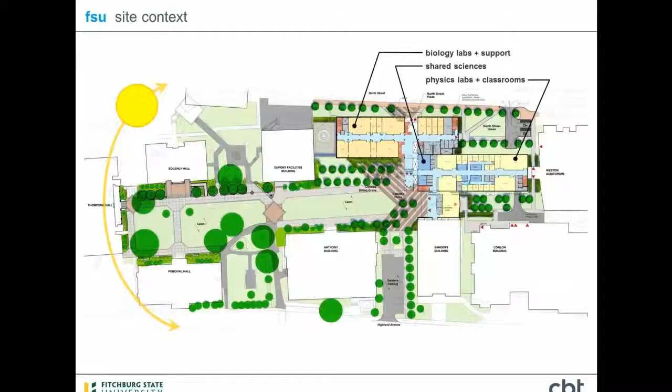The design of the building uses insulated metal panels, double layer of glass, masonry, so punched openings as well as curtain wall. You can see in some of the sections that we have some very tall floor-to-floors for the lab spaces, and then the existing building has much shallower floor-to-floor heights.

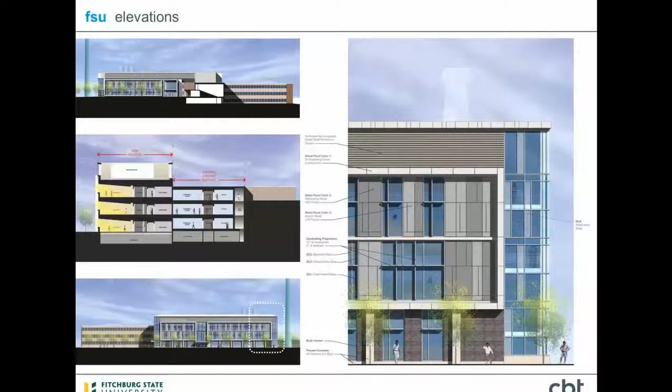So looking at how CBT works, we are evolving as a firm, and the evolution of the firm is really based on evidence-based design, as well as building information modeling, BIM. So we are moving forward with that type of attitude, which means that we're doing work in 3D visualization, using 3D to communicate design, with software packages like SketchUp, Photoshop, Revit, Navisworks, as well as physical models.

We also see that being able to have information captured in our drawings is important in how it's sorted. So Revit is the main platform that we're using. And the biggest component that we've added to our work and how we're working is simulation, so building components and elements. We're using Ecotect and IES to achieve those simulations.

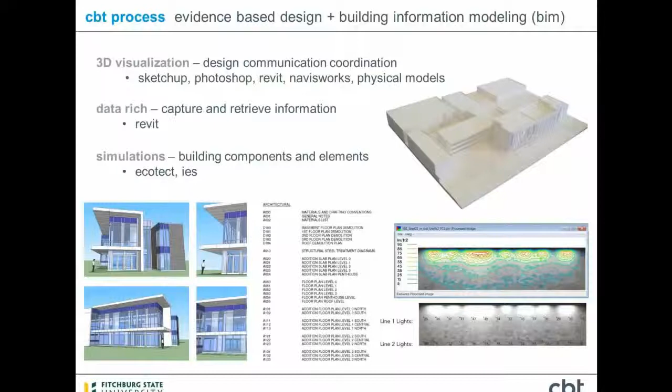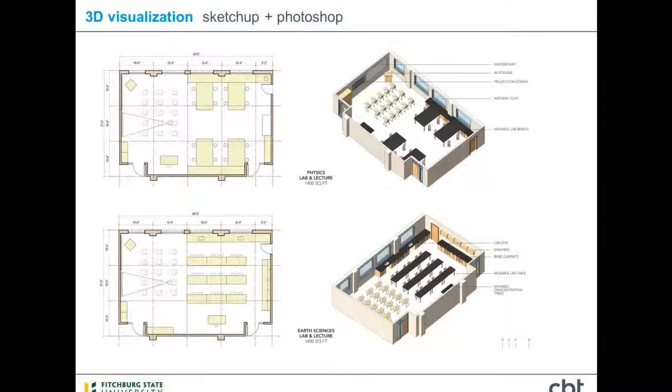So on the 3D visualization, very early on, we're doing quick drawings that are two-dimensional that quickly pop up into three-dimensional drawings so that the user group can see what they're doing and getting, and they can quickly respond to programming needs.

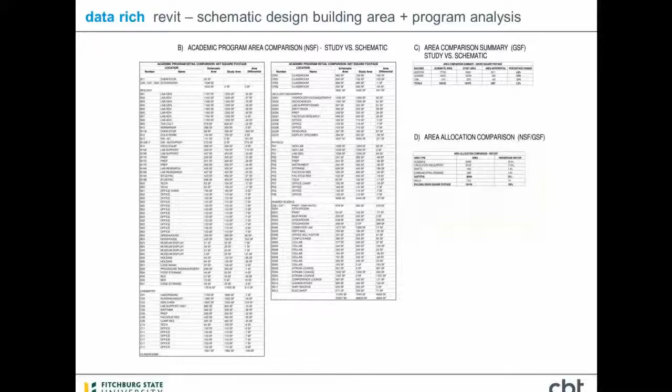Simultaneously, we're working on bringing Revit into the early stages of programming and into schematic design, being very specific about each room and its component. And we're always going back and forth between what was in the study and what was in the schematic design on the plans, to see what the differential is.

So we're tracking all that information and getting a feedback loop from the users as well as the client in terms of staying on target for their space needs, their use needs, as well as their cost requirements.

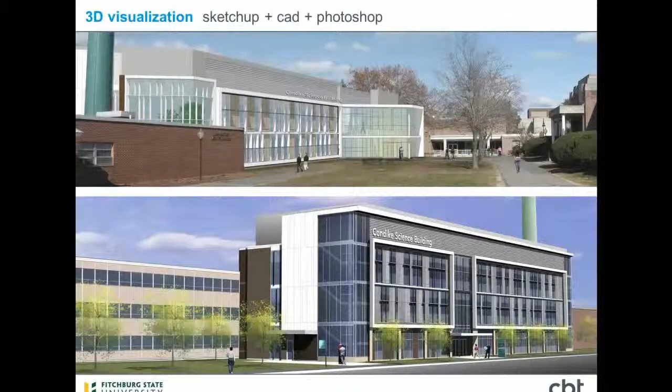This shows you depictions of our design process where we use SketchUp in the upper montage of building in process, and then also using AutoCAD drawings that get pasted up into three-dimensional depictions of the building so that you can see it from different viewpoints. And again, this is about communicating with the clients, for them to be able to understand what's happening on their project.

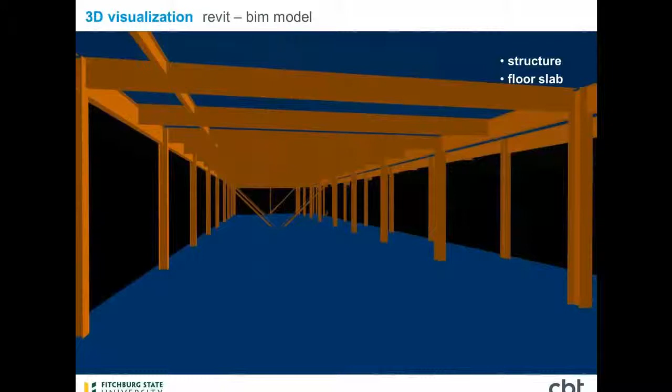And as we move through, we're using BIM, the Revit platform, to create three-dimensional drawings right from schematic design. But these next slides show our work with the structural engineers as they're developing three-dimensional drawings, mechanical, electrical, fire protection, as well, in 3D.

And we're working with lab designers. For example, this lab designer is in California, so we're sharing information across the continent. Our structural engineer is also in another state, so most people are not locally situated, and the information is being shared through the Revit model and using Navisworks as a reader. So this is a colorization, but these are part of our working drawings for the Fitchburg project.

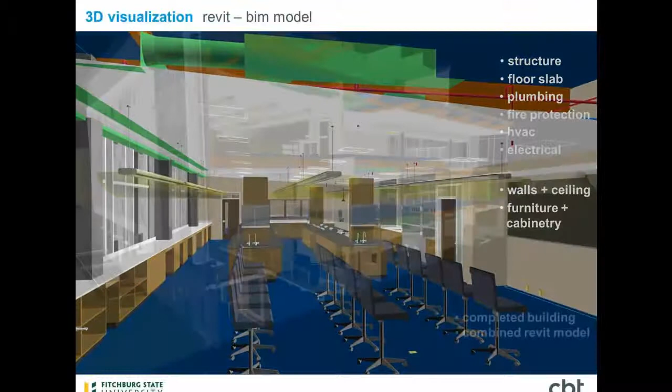And this shows some cutaways of the construction documents for the project. And then we also take construction documents and we'll change the color and change some of the lighting and use them as presentation tools.

So the process of environmental simulations has been of interest to us because it helps us understand how we're thinking about a building's form and skin, taking a lot of the knowns that are in our minds when we start off on a project. So we use Ecotect very early on to generate some basic understanding of form and massing, and how it relates to the specifics of the climate we're in. For example, this one's in the northeast United States, but we have projects in Saudi Arabia with very dramatically different climate issues, so orientation and exposure become important.

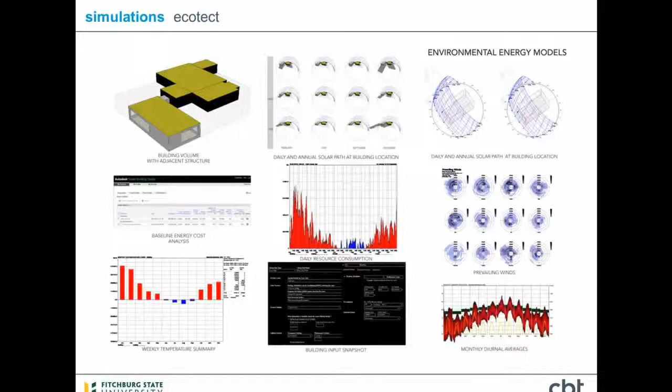So we found that Ecotect is a good tool very early on, but ultimately what we were interested in is developing the design further. This is where the IES software becomes the primary tool for our simulation. So we leave early schematic design and start jumping into IES software to look at wall assemblies and how light is penetrating and heat, and that starts occurring at the end of schematics for us.

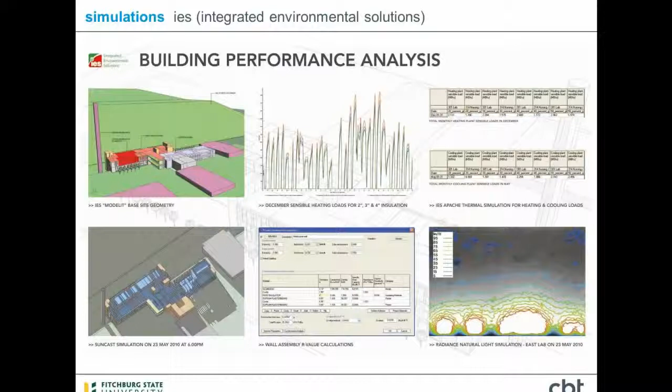So the real core of our discussion today is going to be focused around the simulations we were using with IES, but we want to take a moment to discuss the team process, because for a truly integrated design process you need the key design team members working together and generating information early on. The primary players are the mechanical engineer doing the design of the systems, the commissioning agent who will be fine-tuning the systems and working with the owner or user group to hand over the building and make sure they know how to maintain it, and also, especially in the United States with the rise of the LEED rating system, an energy modeling consultant who runs simulations and validates or confirms the energy reduction targets set early on in the process.

In the Fitchburg process, our MEP engineer was working early, coming up with creative ideas, relying on their experience in ways of saving energy, but also dealing with some of the constraints of the existing building. In our case, we were doing an addition onto an existing building that was going to be maintained and occupied during construction, so the new MEP plant had to be contained entirely within and on top of the addition, so it would be up and running when it came time to switch over. We also had concerns about putting additional load on the roof of the existing building to avoid some seismic upgrades. This image shows the reality of what they have to deal with as they work to optimize the systems.

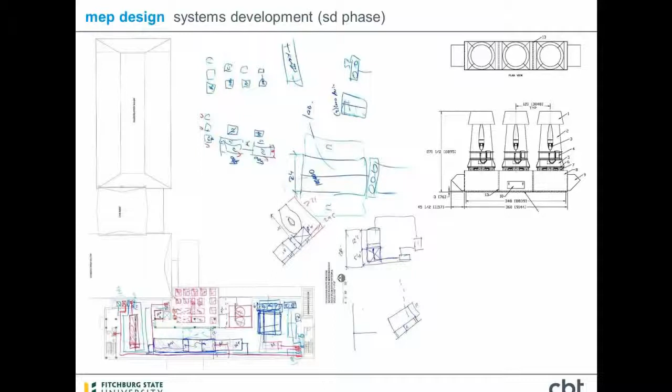Bringing the commissioning agent on board early is critical, because as the ones who see the systems through to operations and getting run efficiently, they need buy-in on the basic design concept for the systems. But they're also a valuable resource in looking at benchmarking and different criteria. In our case, they looked at other state universities developing science projects, Labs 21, and a number of other peer institutions to find out if we're pushing the right envelope, lagging behind, or way out ahead of where other comparable institutions might be.

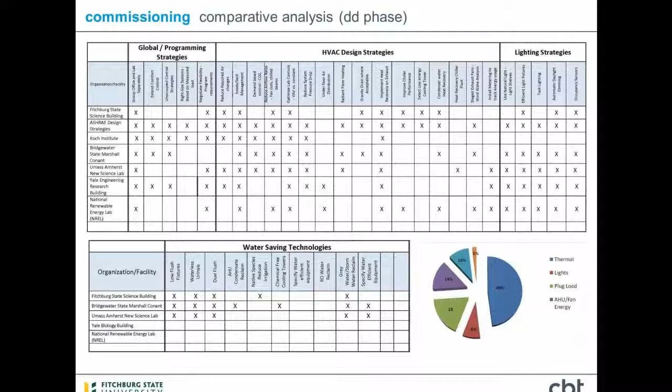Then with the energy modeling consultant, they're primarily focused on MEP systems, measuring against baselines and targets. This diagram in the top right shows something very early and schematic, before there's really any sense of exactly what the systems might be. We see a lot of green bar charts to the left of the baseline, meaning we were not yet achieving targets in those areas. The goal is that by the end of the construction document period, all those things would be swinging around to be to the right of the baseline.

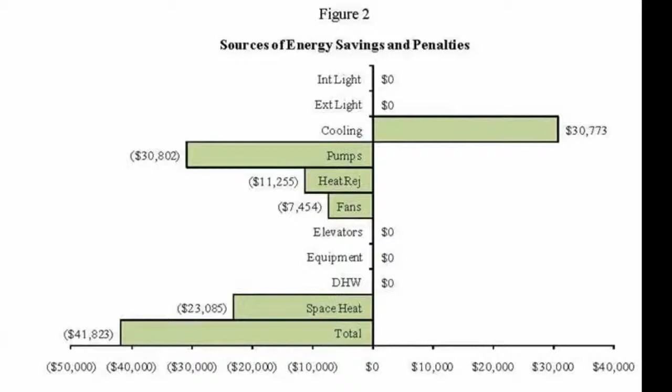In order to supplement the work we were doing with the energy modeling consultant, we wanted to take a more active, proactive role in simulations and modeling so that we could get data in real time as we're designing the building. We weren't comfortable with a more traditional approach in which you send out a milestone set of drawings for cost estimating and for energy modeling, and then when you get the results six or eight weeks later, it's really too late to incorporate the best and optimal design.

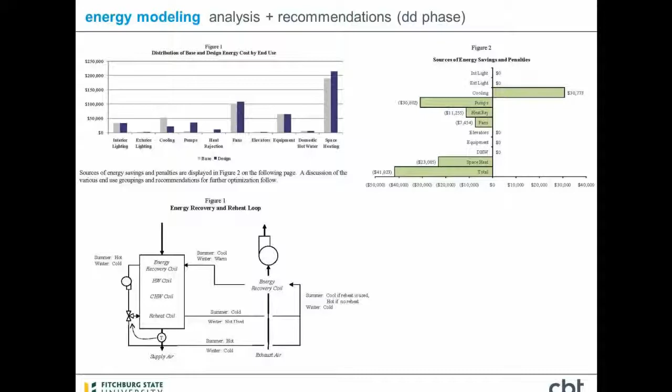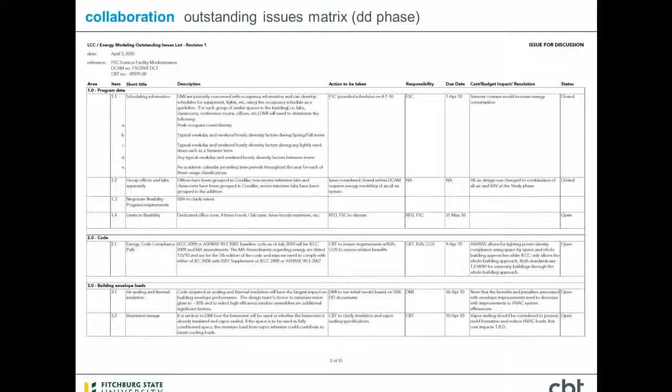If the project is working well through this process, there's a tremendous amount of ideas and data being generated, and an ability to organize and track that and find out which are the priorities, and make sure we've accommodated the best ideas that the team has come up with. We need organizational tools like this chart, where we've grouped ideas for energy savings into different kinds of criteria and categories for easy tracking.

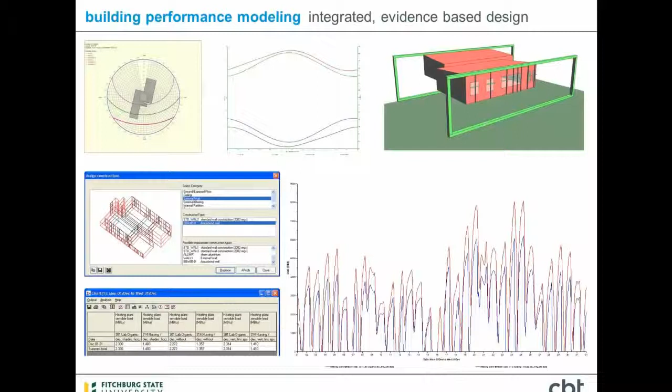And so that really leads us into the energy modeling we were doing ourselves. This is just an overview of the range of topics we were looking at. As Alfred noted, we were primarily focused on thermal issues, on solar issues, and on daylighting issues. The next series of modeling simulations we're going to bring you through will show you that.

What we were using then is our own simulations to find the good, better, and best solutions, incorporate what we thought was the best solution, and then having run the simulations, rather than waiting for the results, we were providing the data to our energy modeling consultant to validate that what we thought was the best approach was in fact the right route to go. So with that, we'll get right into our energy modeling.

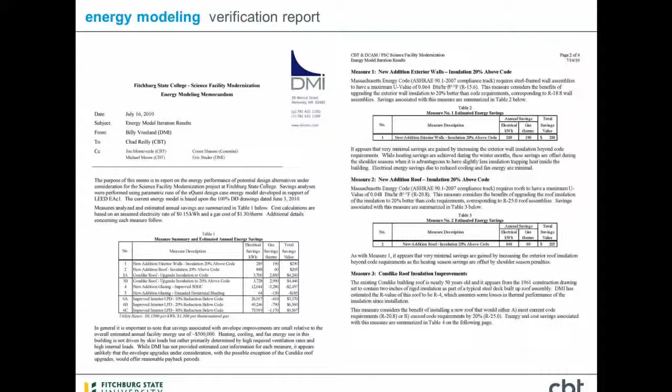When you're dealing with an energy model, that all really needs to be streamlined right down. Really the core things that are critical in the energy model, first is the location and the surrounding context, but then it's really layering up a series of spaces, adjacencies, and planes that have different properties. So the model is simplified to shading elements, enclosing elements, and adjacencies, and we'll take you through a series of developments of those to see how the pieces interact with one another.

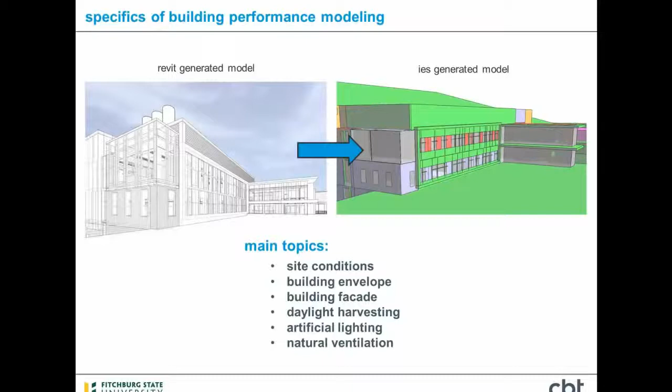So the first set of experiments we ran had to do with the site context. When the initial base model was developed in the Modelit software that comes with IES, we also wanted to look at the surrounding context. So the first thing we did was import some of the weather data from a nearby airport, so we were simulating something extremely close to our actual conditions on the site.

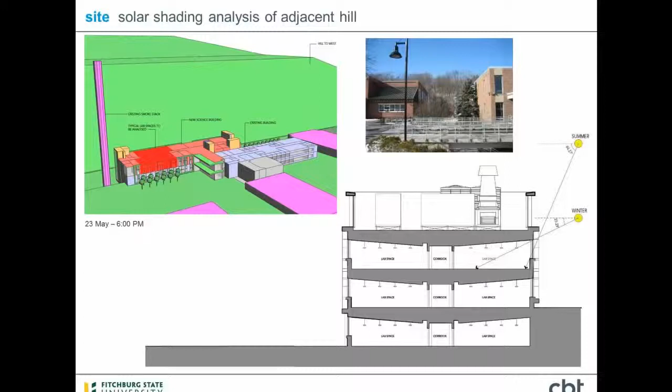We also knew from our experience on the site that there's an extremely large hill due west of our project site with a large ridge line that ran right parallel with our north-south orientation. Initially we weren't sure if that hill would have any impact on solar gain, either beneficial shading in the summer or cutting out light that we might want during the winter time. So we ran a series of simulations and found that for the times we're occupying the building, there really was no impact from the hill.

As a result, we were able to discount that element from our future simulations. Had we been in a dense urban situation with high-rises or other things that might cast shadow or glazed facades that might reflect additional light onto the building, that would be a key thing to take into consideration. But in our case, the row of deciduous trees we're intending to plant right in front of the building are a small element compared to the hill, but by being in close proximity, they're actually going to have a larger impact on the building than the hill, which is quite further away.

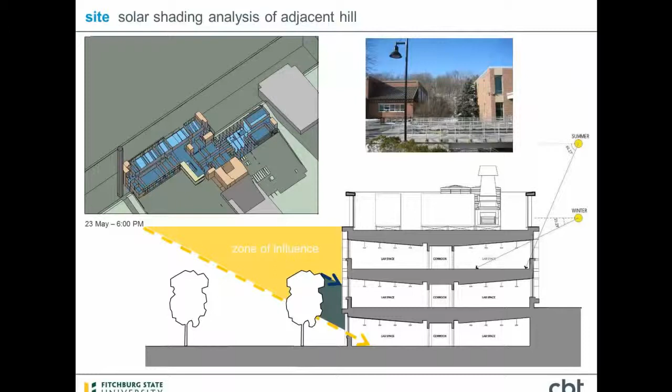I'll turn it over to Liam now for discussion of the building envelope simulation.

We used IES to look at a number of specific components within the building envelope and built up different assemblies, some standard within IES and some custom, where it was fairly straightforward to modify the assemblies to meet local construction practices. We ran these simulations on a building-wide basis to see how they would compare in terms of potential energy savings, and then worked with our energy modeling consultant to evaluate the projected costs of any savings versus our initial outlay for materials.

The first of these we looked at was the exterior building insulation. One simulation was run using the code-required minimum 2.5 inches of rigid insulation, and we compared that to a simulation with 4 inches of insulation, a 20% above-code increase. The assumption was that by spending a little money up front on additional insulation, we'd improve the operating performance and cost of the building moving forward.

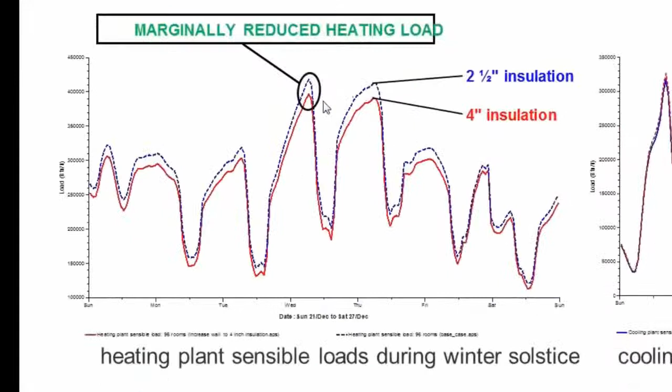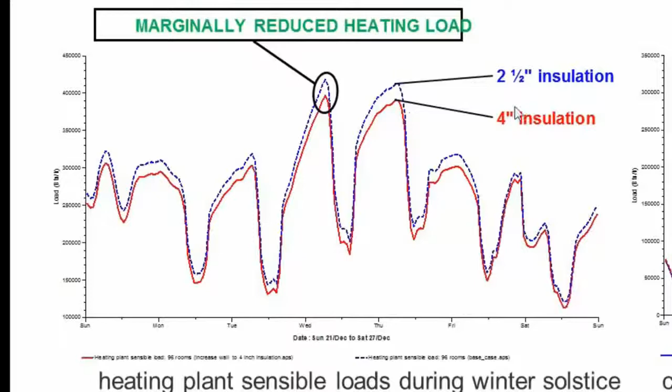What we actually found was that while there was a fairly noticeable reduction in peak heating loads between the 2.5 inch insulation and the 4 inch case during this peak week, on the cooling side it was almost not a noticeable amount.

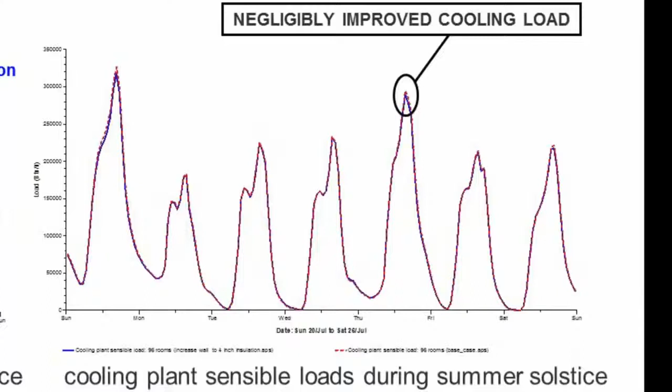Within IES, we were also able to look at aggregate yearly loads and take those numbers back to our consultant to generate some figures. We determined there would be an annual savings of about $290 per year by upgrading the insulation. So we decided not to spend the additional $12,500 required for that additional insulation, which would have resulted in about a 40-year payback — not something we decided to pursue.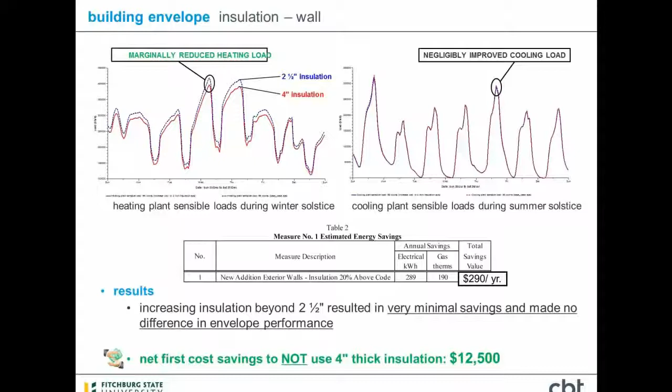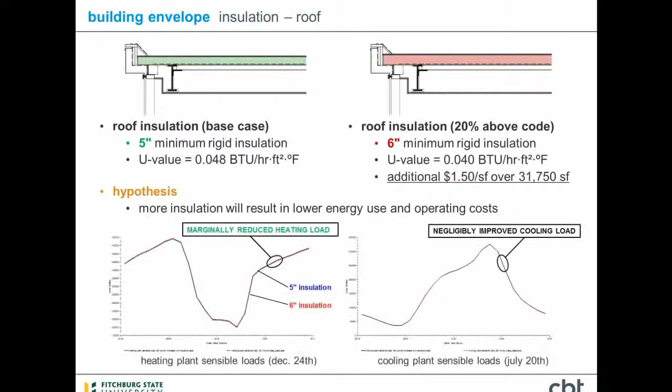We did a similar series of simulations on roof insulation, and found when looking at peak periods that there was a very marginal reduction in heating load between the two insulation thicknesses. On the cooling side, it was even less noticeable graphically.

Looking at overall energy used, we examined two conditions: the original constructed building we were renovating, which only had 2 inches of insulation, and upgrading that to the code-required minimum. We determined there'd be about $4,200 per year savings in energy costs. Were we to increase that 20% further, we'd get less than an additional $200 above that — so again, having more than the code-required minimum didn't seem to be the right approach for us.

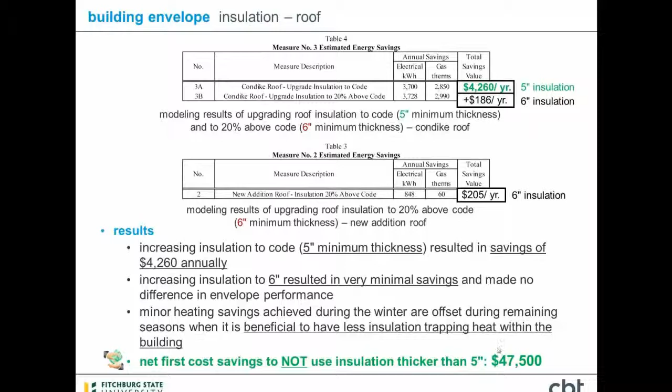We looked at that within the addition as well, and found about $200 per year in savings there. So we decided to stick with the typical amount of insulation and forewent increasing it, saving $47,000 up front for the client.

In general terms, looking at the loads on this building, when modeling the entire project over the course of the year in terms of BTU loads, in red you see the heating loads and in blue the cooling loads for this particular project, site, and orientation. The peak is higher on the heating side, and aggregately, heating really dominates the operational costs of this building.

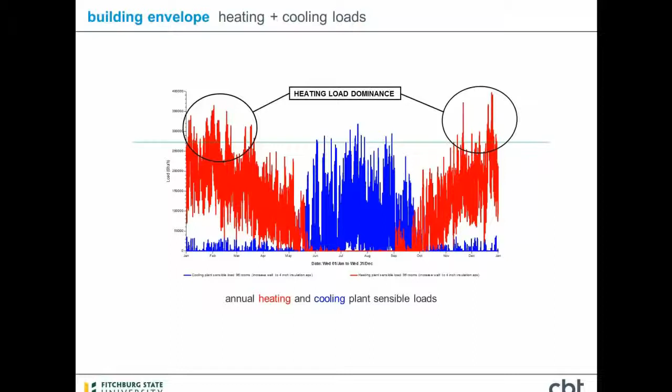Compounding that is the fact that this is a university setting, and this particular facility is not expected to be in operation during the central months of the summer. That particularly came into play when modeling the performance of various glass systems on the building.

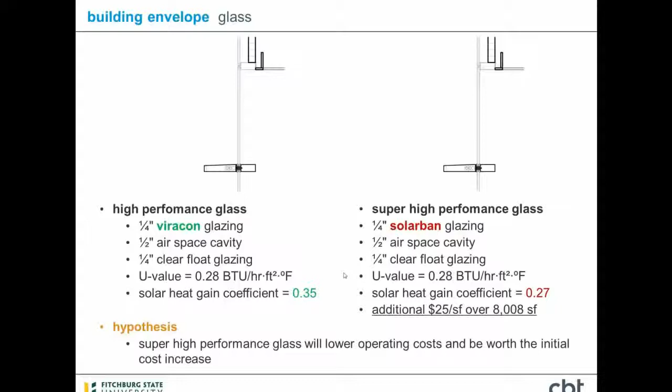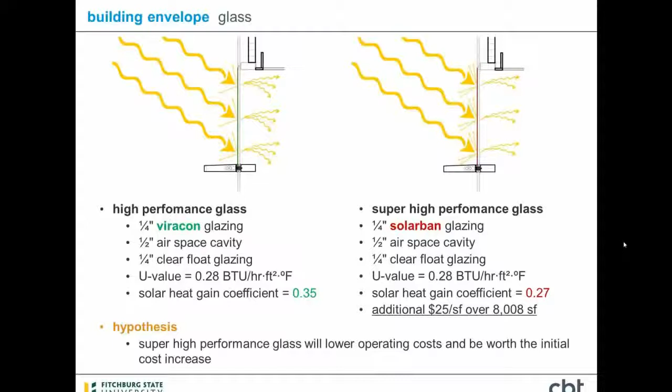So in modeling that, what we did is we went into IES and were able to specifically model the actual products that we were comparing, getting some of this information directly from the manufacturers. We were able to create the exact glass buildups and performance characteristics that we're looking at putting in the building, and ran separate simulations after assigning those into the model.

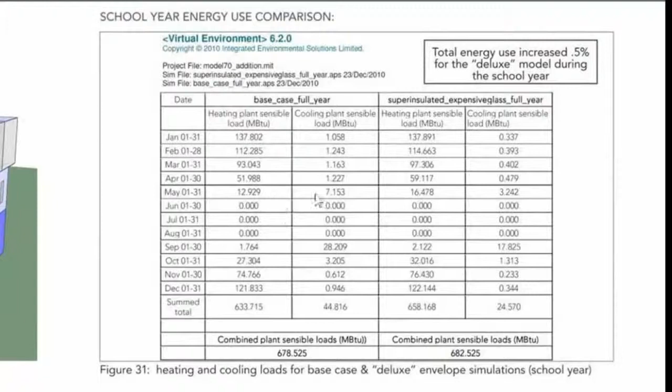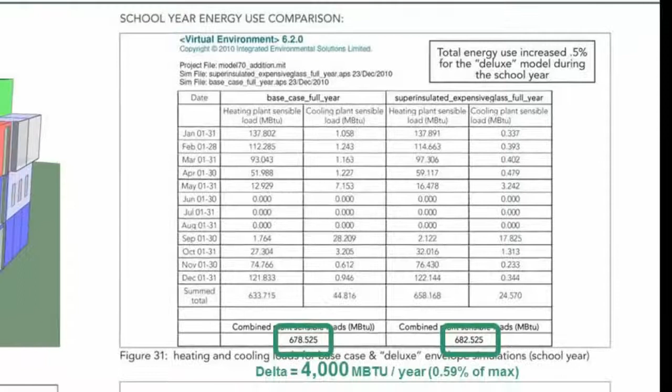We were able to generate month-by-month loads, both on the cooling and heating side. On this side of the chart we were generating for the typical low-E glass, and on the right, the lower shading coefficient glass. We did see a dramatic reduction in the cooling loads, dropping it by 45%. On the heating side, we actually found we increased the heating loads by 3.9% in the winter, where that solar gain is actually a benefit to the space.

As you recall from a previous slide, the heating loads are dominant when taken on the aggregate over the year in this building. So in our case, the modest increase in heating loads more than canceled out the energy savings we got on the cooling side. When we looked at it in terms of the aggregate amount of energy, it was 4,000 mega-BTUs, which on the face sounded very small, considering it's only about 0.5% of the building's energy consumption.

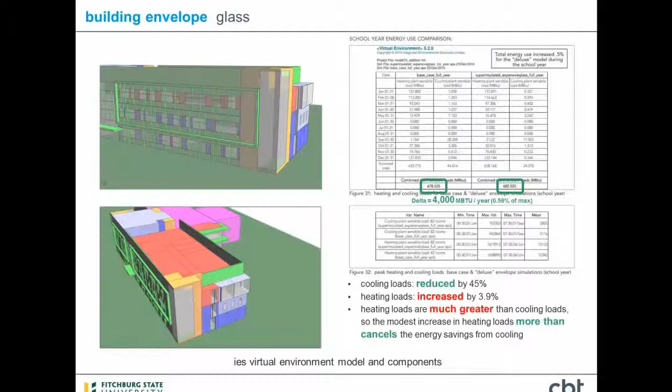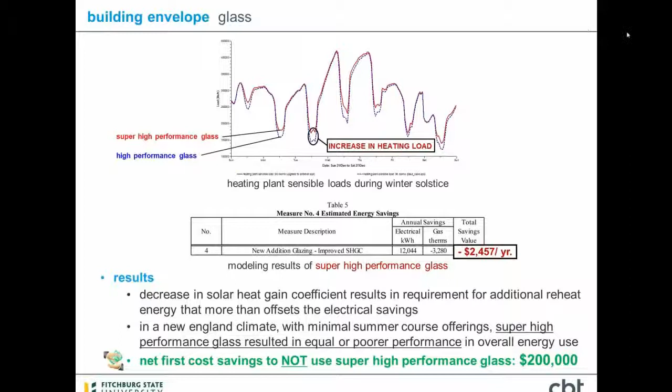That said, working with our consultant, we were able to show that that amount of energy, given our energy costs here, represented about a $2,500 a year additional cost to the project, and that would have been on top of the fact that we spent $200,000 to, in theory, upgrade the glass. So needless to say, we didn't pursue an additional upgrade in the glass.

In addition to some of the overall building analysis, where we were looking at components throughout the building, we looked at some key elements and spaces around the building. Shown here is an entry pavilion into the building, which is on the quad side. It was intended to be a focal point for the entry of the building, and it's also a major two-story gathering space within the heart of the building.

It also happens to be southeast facing, so we've got two stories of southeast facing glass, and the concern was that it was going to be, if not fairly uncomfortable, a fairly significant cooling load that we could avoid if possible. So we looked at a series of different overhang configurations, ranging from 1-foot overhangs up to 7-foot overhangs, to see if we could justify the additional expense by way of any savings realized.

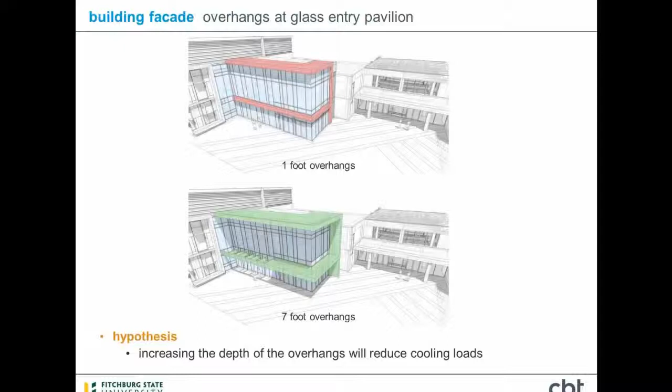What we found was that between a 1-foot overhang and a 7-foot overhang, there was actually a fairly dramatic reduction in the cooling loads on that side. We were able to reduce the cooling loads by 21%, which represented a significant cost savings to the university. On a related note, here's that glass entry pavilion we talked about that we modeled specifically for looking at the overhangs.

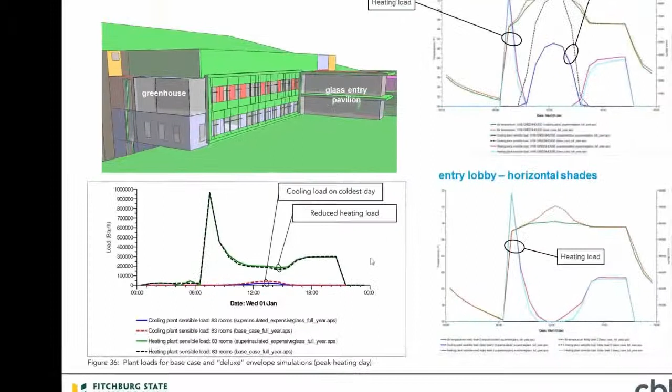When we looked at the overall building performance for more global issues, IES, as part of that process, let us look at all the data aggregated into one graphic, like we have down on the lower left here, which looks at overall building performance. But within the same files, you can actually go in and look at individual spaces.

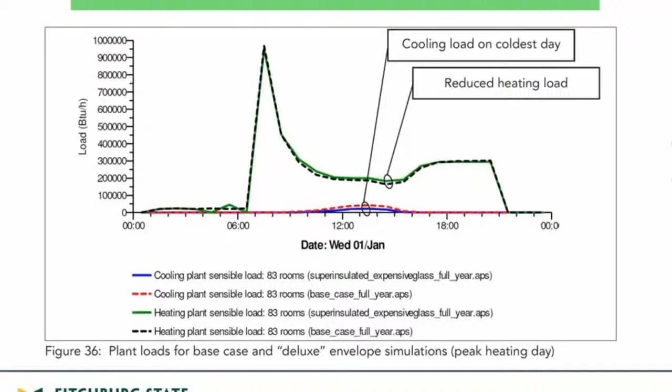I happened to be looking at the overall building performance on the peak heating day, and noticed there was actually some cooling demand at midday in this building. I was curious as to where that might be so we could address that situation. So I was able to go through room by room and in real time watch these graphs update room by room to see where the loads were.

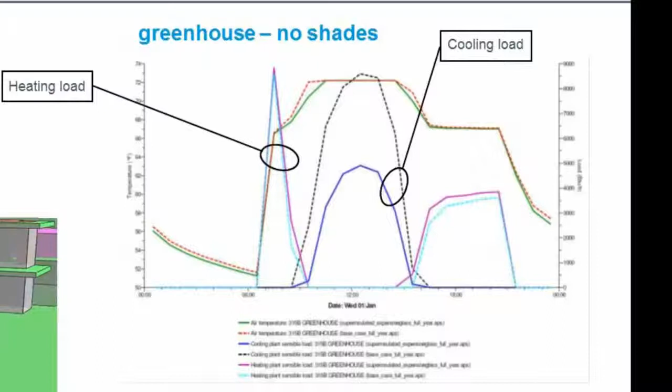Identified that we have a southeast facing greenhouse — not really a greenhouse proper, but more of a botanical sciences laboratory. But it's southeast facing, very tall glass with no shading. As you see here, these lines indicate the heating loads early in the day, and then as the heat gain comes in, we actually got into a situation where there was a demand for cooling, and then later in the day, switched back over to a heating load.

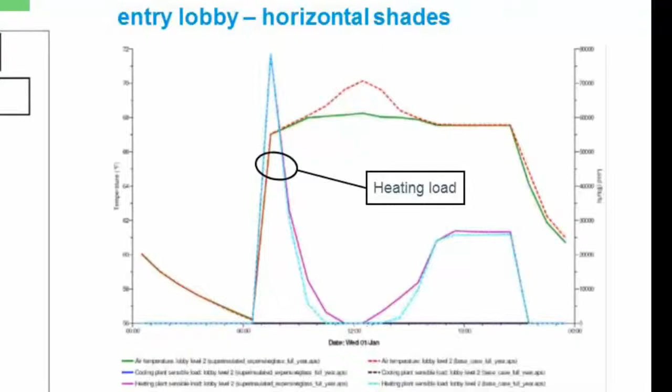So I was curious and looked back at our entry pavilion that we discussed before, and if you look at the same space, you have a similar pattern where the heating load in the morning drops off, but because of those overhangs, you never get into a situation where there was a call for any cooling during that winter day. In addition, we were able to identify the greenhouse as a location where we wanted to add some operable blinds to the windows so that we could avoid having to cool that space in the winter months.

Continuing the theme of solar shading, part of the design of the building, we wanted to inform through an evidence-based process. We looked at a series of vertical and horizontal shades to ensure we weren't making mechanical systems for a lab building work any harder than they needed to on the building envelope, to be part of the optimized performance of the building.

What you see here is a very simple model. For some of our simulations, we didn't run the entire building model in IES, but built a series of these little vignette models to look at isolated issues. In this case, we have a west-facing lab and an east-facing lab. The large green rectangle is an architectural element that projects out from the facade, and we wanted to make sure any impact it had on shading was taken into consideration.

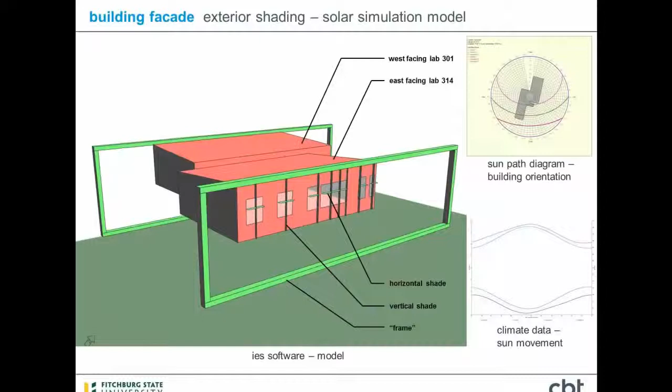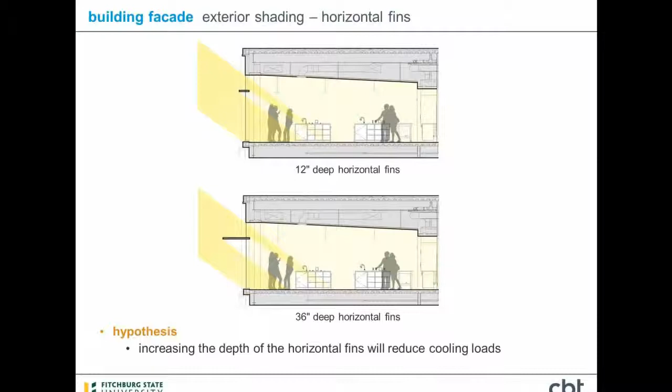We looked at a series of vertical and horizontal shades to try to optimize their performance. Starting with the horizontal shades, we looked at a series of depths. This one shows the 12-inch and the 36-inch, with the idea that if we can eliminate some of the unwanted solar gain into the space, we can take some of the load off of the cooling. This graph is an amalgamation of all the studies we ran with vertical, horizontal, and no shades.

Mapping them all together really expresses a major point that is the focus of our goals here. When you look at the peaks, even the best, most aggressive, environmentally conscious engineer still looks at peak loads when sizing their systems. So if we look at some of these simulations, reducing a peak slightly, as these two simulations indicated, really has no bearing on first cost, because you still need the full-size mechanical systems to handle that peak load.

There may be a minor reduction in operating cost, but what you really want to look for are opportunities where you can dramatically lower the peak. If you can bring the peak down, you can bring down the load of the building, which means reduced first cost because you can downsize the air handling equipment, chillers, boilers, and other major pieces of plant. You can also reduce the operating cost of the building.

As we moved through our shading studies to optimize, we found that for the horizontal shades, we were getting good performance out of the 12-inch and not a dramatic increase with the 36-inch. So the added cost for the deeper fins really was not warranted in our particular location.

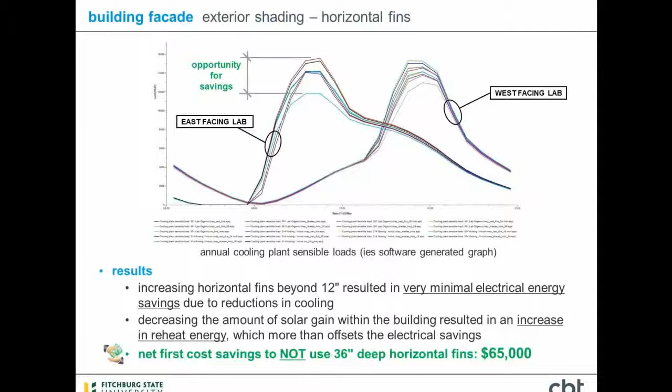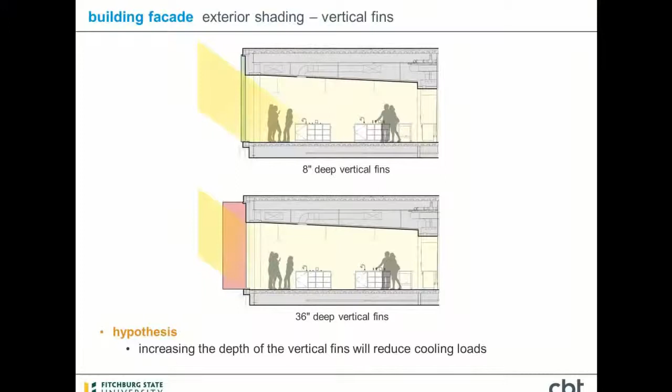We did a similar study with vertical shades, the rule of thumb being that for a west-facing lab, vertical shades should work better. We ran a series of simulations of shallow and deeper fins, and when we got our results back, we found there wasn't actually that great a difference between the 36-inch and the 8-inch fin, and we were getting better shading out of the horizontal.

Partly, I think it was due to the fact that the horizontal shades were allowing in the winter sun. So this is actually a bit of a trick slide—we're not looking at cooling plant in this slide, but the heating plant. One of the key points to take away is that as you isolate one variable, like looking at reduced cooling load, you need to make sure there isn't an unintended effect at the same time.

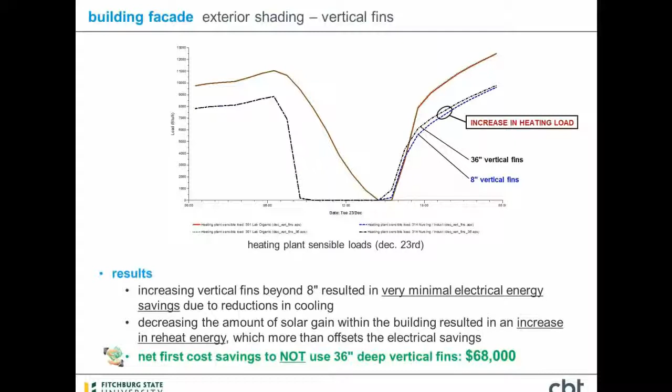So we ran cooling simulations, but then as we focused in on the fact that we were being driven by heating load, we made sure there wasn't an adverse effect caused by the same device.

When you plot all these things out together through IES, you're able to get a series of different iterations that you can look at and compare. For cooling, having no shades was the worst scenario, both in the east and west facing orientations. For heating, having vertical and horizontal shades was the worst because we were blocking out the beneficial sun. Mapping a series of iterations gives you the ability to fine-tune different orientations of the building and optimize the shading devices for the best and most effective impact.

We also did a number of studies looking at typical spaces within the building to evaluate the amount of usable daylight we could count on, given the glazing we ultimately selected and the orientation of the various spaces, with the aim to see if we could benefit from controlling the interior lighting.

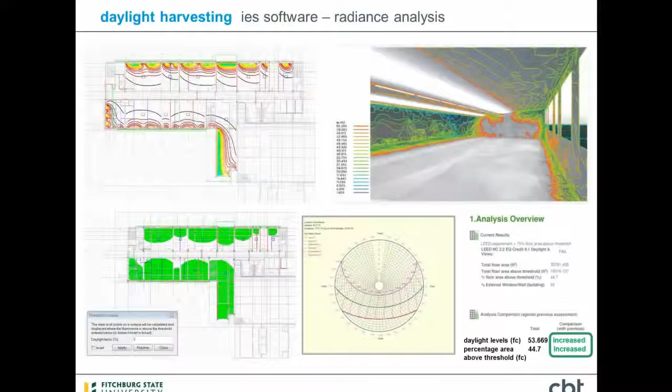At the upper right, you'll see an image that shows 2 out of 3 lines of lighting, indicated by the white lines at the top. The third line of lighting isn't shown because it's turned off, and the daylighting coming through the window actually results in a fairly even illumination through the space.

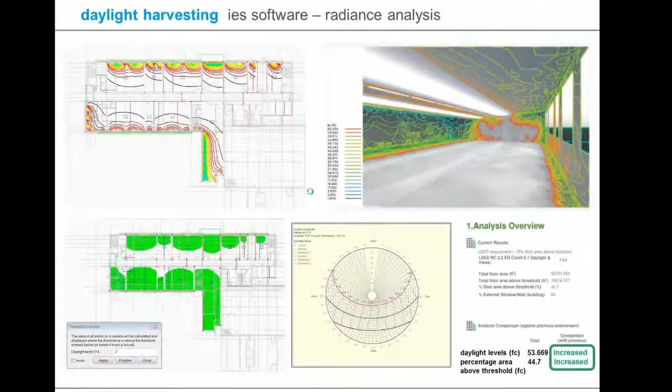Looking at the typical sections of these spaces, you can see the 3 lines of light. We wanted to evaluate whether adding light shelves would increase penetration deeper into the space so we could get more usable light throughout. Initial studies showed we could get a fairly good amount of usable daylight for pretty much the outer half of the lab, and we did further investigation based on the outer 2 rows of lights.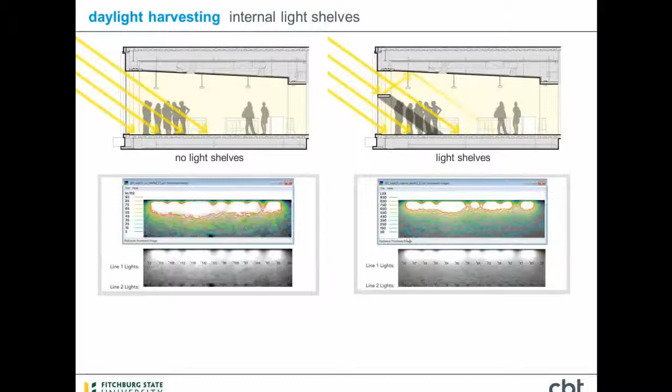Below, you can see the types of outputs we were getting within IES Radiance—one being a more graphical view, where you could look at sample points and see that the lighting level was actually reduced when we added the light shelves, as well as looking at point readings. Within this module, you can control the density of the grid and how it outputs, and we controlled that so we were getting point readings corresponding to the lines where the actual light controls and rows of light were going to be.

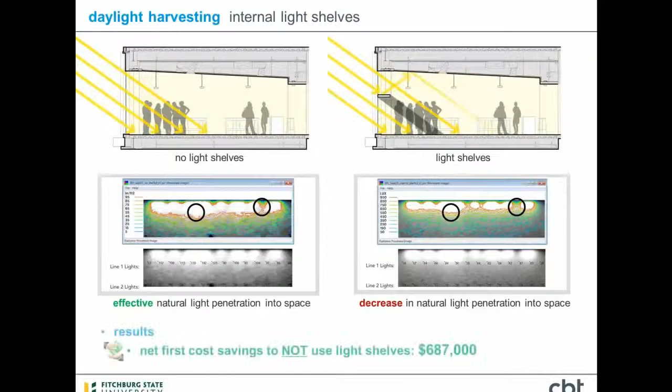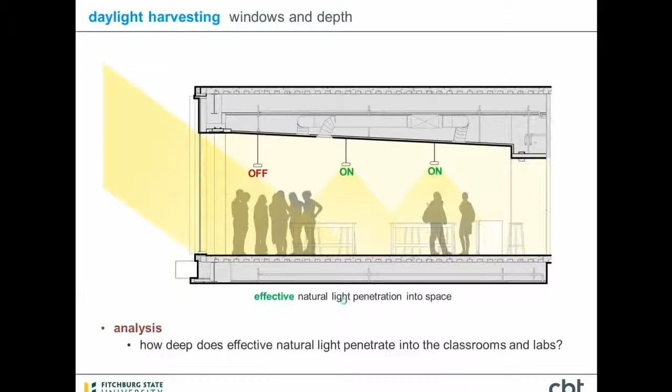So looking further, without the light shelves, at how we might control the various rows of lights within the space, we wanted to see what types of controls might make sense so we could get the best performance out of our artificial lighting, given the natural lighting.

Within the Radiance program, we placed theoretical light sensors corresponding to those rows of lights, where we would theoretically have a sensor controlling the dimming. We were then able to output, for each sensor location, the actual illumination levels at a lab bench height for each hour of the day, across every month and every day of the year.

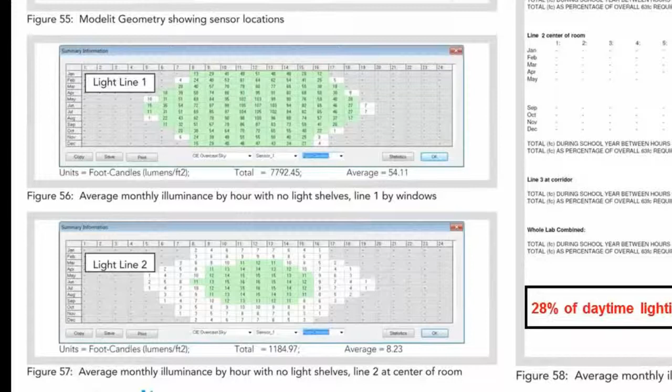One thing we saw was a lot of usable light at the outer row of lights and a fairly good amount at the second row, but at significantly different levels. That alone showed us that if we were going to do light sensing controls, it made sense to independently control both of those layers of lights—which is something we did implement in the project.

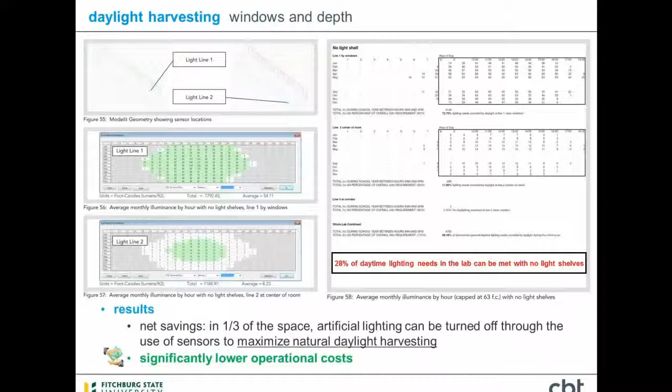We also took the light levels generated from that and compared them against the recommended illumination levels for a laboratory, during the times of day and days of the year the lab was actually operating. We determined that 28% of their daytime lighting needs in the lab overall—even accounting for the third row of lights that we weren't controlling at all—could be met using natural daylight. So hand in hand with maximizing daylight harvesting, we wanted to be sure the artificial lighting was also optimized.

Being a northeast climate, all through the winter it gets dark quite early, and there are many times of the year with no daylight availability. We wanted to make sure the light levels were being met and functional, but also that we weren't overlighting the space.

Early on in DD, we had developed an architectural lighting idea, shown in the middle diagram, with a series of direct and indirect pendants forming an architectural road that gave shape and definition to the space. We hadn't fine-tuned the total quantity of lighting early on in DD. When we transitioned toward construction documents, we started looking at this more closely on a space-by-space basis, setting up individual room models for each prototype space—office, lab, or conventional classroom—to optimize each one and apply the lessons learned to similar spaces.

Interestingly, the mass energy code baseline is 1.4 watts per square foot, and our initial lighting layout was 3.71, well over the allowed limit for that space. On aggregate we were right on for the entire building. Our electrical engineer ran a check for the code and we were right at the code baseline, but we certainly wanted to do much better than that.

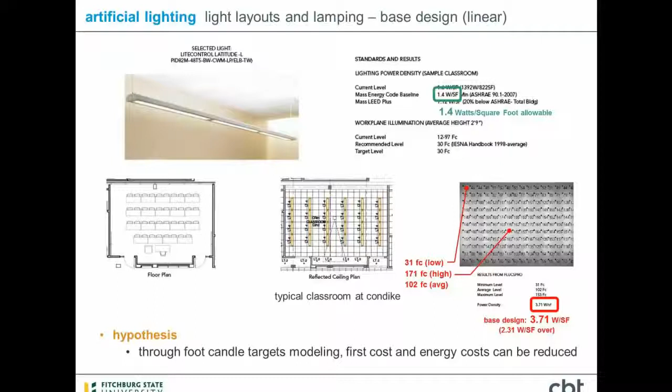We set a target of trying to do 30% better than what we'd be allowed, and used the IES tools to go space by space analyzing each one. We ran iterations, and for the conventional classroom we worked out a more gridded arrangement of lights. We were able to hit the average right on target, bringing the power density down to just under 1 watt per square foot—even better than the code reduction limits we'd set for ourselves.

On aggregate for the whole building, after going through all the spaces and incorporating lighting revisions, we did just better than our 30% reduction target. This resulted in significant first cost savings, since we eliminated a number of light fixtures previously in the design, and it reduced the operating cost of the building with fewer lights. Hitting that 30% target wasn't arbitrary—it was focused on potential energy incentives the university can now realize. It was a very useful tool for fine-tuning the design and hitting the targets we'd set for ourselves.

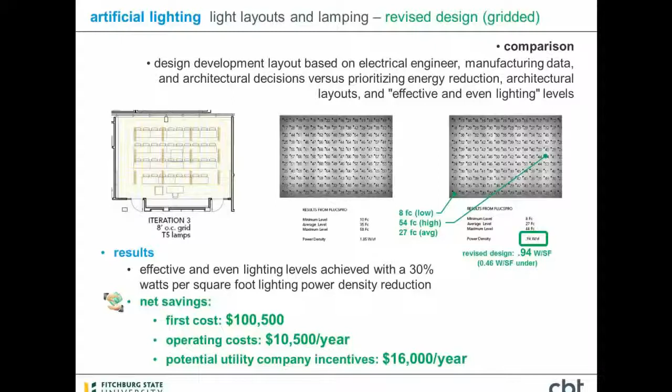This is a southwest-facing stair, and at this face of the building it was meant to be a new entry to the campus and a major architectural feature, something to be seen glowing at night. But there was concern that given the extent of glass, the stair would be extremely uncomfortable, and typically these stairs aren't conditioned by mechanical means. If they were, it would represent a fairly significant load.

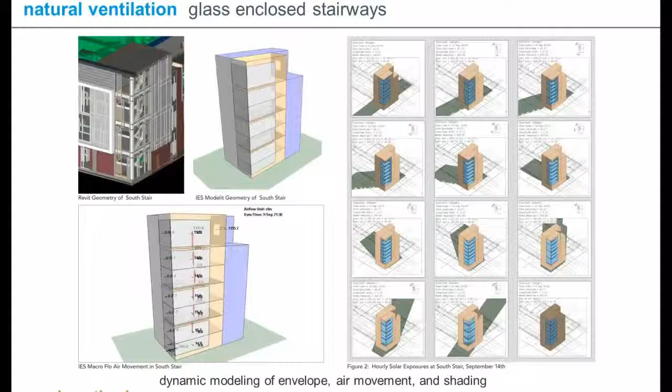We also looked at a number of different control programs for when this should open, whether it should open up before the temperature got to a certain point, when they should close, different types of louver sizes, and we ran a number of simulations to show that.

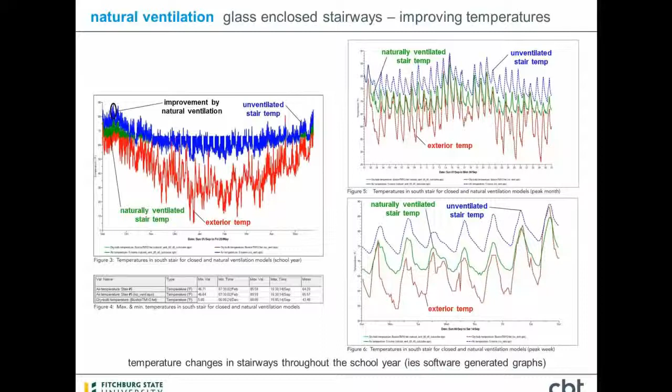What's a little more dramatic is that IES allowed us to set a threshold and sort the data based on that, so I could track how much of the time we would go above 72 degrees within a stair, a common cooling set point. We determined that just by naturally ventilating the stair, we would cut the amount of time it ever went above 72 degrees in half, so less than 10% of the time the stair would go above 72 degrees.

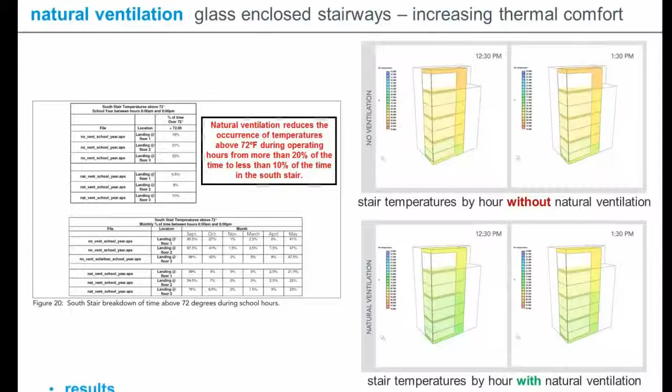Had we decided to address this problem with artificial cooling, which we probably would have had to because the stair was getting up into the high 90s, we would have had to buy additional capacity in our cooling system to the tune of about $34,000.

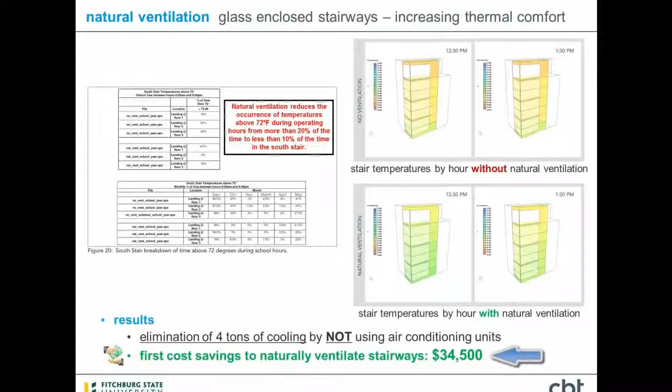So looking at this in total, what are our lessons learned? We had a project team, right from the owner down through all the consultants, who were really committed to a high-performance building and optimizing energy reduction.

If we'd been doing this project 5 or more years ago without tools like IES available to us, we would have gone in willingly trying to spend money to save energy, and could well have done things that the rule of thumb says are wise, but having run the simulations, we would have been putting money in that really had no payback.

Just for the things we looked at alone, independent of all the mechanical engineering energy savings, we could easily have spent about $1.5 million on a variety of things that sound good, sound prudent, sound like energy conscious and sustainable approaches, but when you actually boil them down, there's maybe a more effective way of addressing the exact same issue.

So in addition to the first cost savings, which you can put directly back into the programming and benefit the people using the building, on top of the savings the mechanical engineers were realizing, for these things we studied the building performance itself was able to reduce annual energy consumption by almost $34,000 a year.

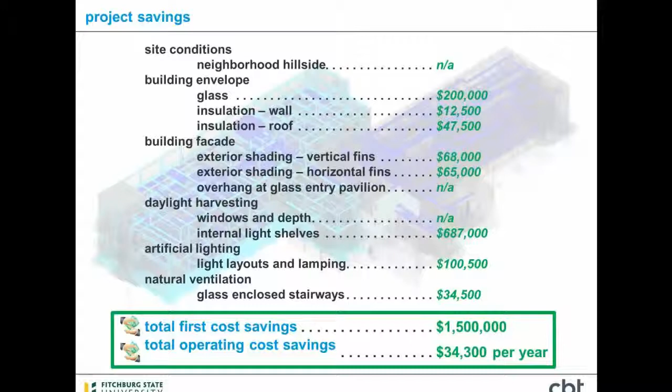So what do we take away from this? What are the lessons learned? Initially, although we focused mostly on the energy modeling simulations we ran today, it really relies on all the key party members setting goals, sharing goals, agreeing early on, and contributing and collaborating to make sure those goals are realized throughout the design process.

Number 2 is that if you want to do better than a rule-of-thumb building, you can't rely on manufacturer data or assumptions that because something's more expensive, it's necessarily better. You really need to do specific simulations that are specific to your project, your location, and the way the building is actually going to be used.

And third, in order to have the data available to make informed decisions, you need to do continuous experimentation throughout the design phase, and make sure you have the feedback when you need to make those key decisions, not 6 or 8 months, or 6 or 8 weeks after the fact.